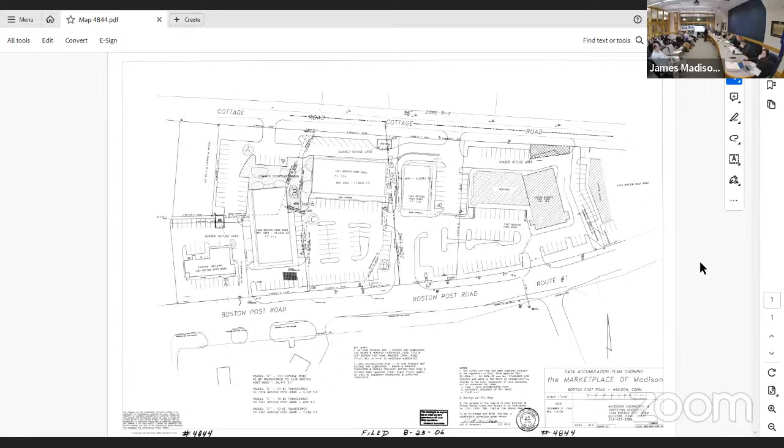Aaron, if you call up that map, I can email it. I'm going to hand out hard copies of these. This is a copy of a map that's on file at the town clerk's office. It was filed back in 2006. Giving it to you, I think it might be helpful with regard to what we're asking for in relation to what was previously approved by this commission. Great, thanks.

If you look at this, the property is at 1339 and 1341 Boston Post Road. They're between the Hammonasset Package Store, at 1333 Boston Post Road, and the white building with the pillars in front at 1343 Boston Post Road. So just to orient you as to what's going on.

Those properties were part of an application for special exception permits that was presented to this commission and approved by this commission in 2004, as part of the overall development of that section of town. It was located in the commercial district then, it's still located in the commercial district, now your C district under your current zoning regulations.

If you look at the map, this was filed in the town clerk's office in 2006. The properties we're talking about in tonight's application are, this is 1341, this is 1339. I want to point those out to you, but if you look at the size of the lots and the location and size of the footprints of the buildings, and compare them to what we're presenting this evening, they're identical.

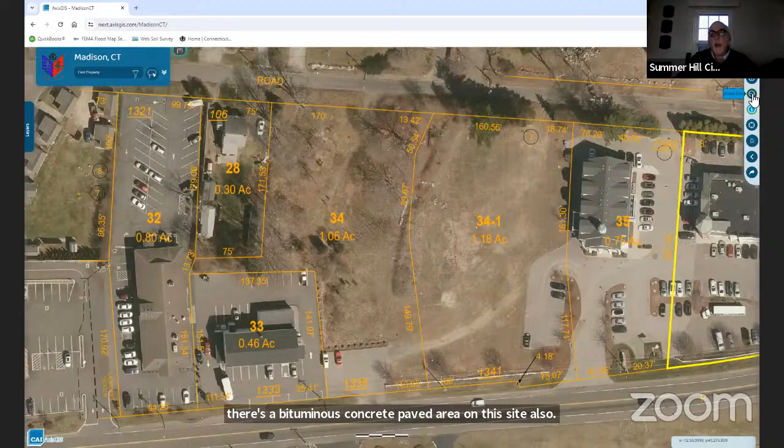the marketplace development. And then I'll zoom in just a little bit more, let me try to get rid of some of this. So this is a little bit more zoomed in of the 2 parcels, lot 34 and lot 34.1, and you can see that they're both undeveloped currently. This is a 2016 ortho photograph, and it's still accurate. It shows a 7 parking space area on the lot that this parcel uses, and there's a paved area here. There's no parking spaces actually delineated, but there's a bituminous concrete paved area on this site also. Please stop me if you have any questions while I go through this.

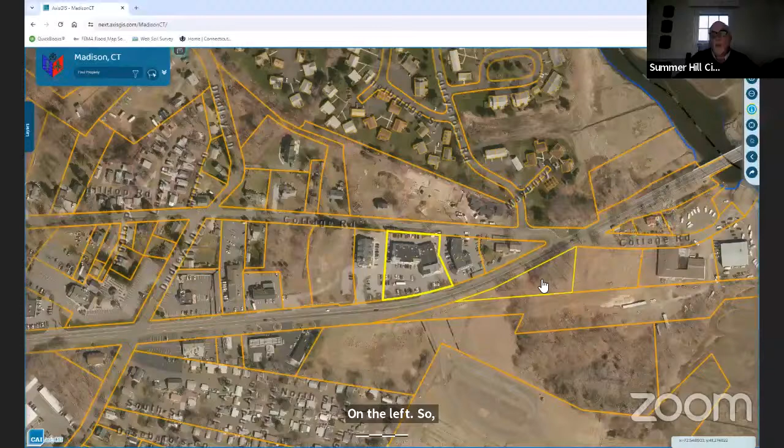I'll try to make this quick. So I've zoomed back out just to give you a little more context. So the Hammonasset River and the Clinton line, I know you're all familiar with this, but Salt Meadow Park across the street, and Dudley Lane here on the left. So the Wellington development is here, this yellow parcel that I just highlighted, and that's the development that's under construction now. And this is Windermere, of course.

So I'm going to, I think I may have to stop sharing, unless you can — can you see my plan set now? No, not yet, no. Okay, I think I have to stop sharing, unfortunately, and reshare.

How about that? Yep. Yes.

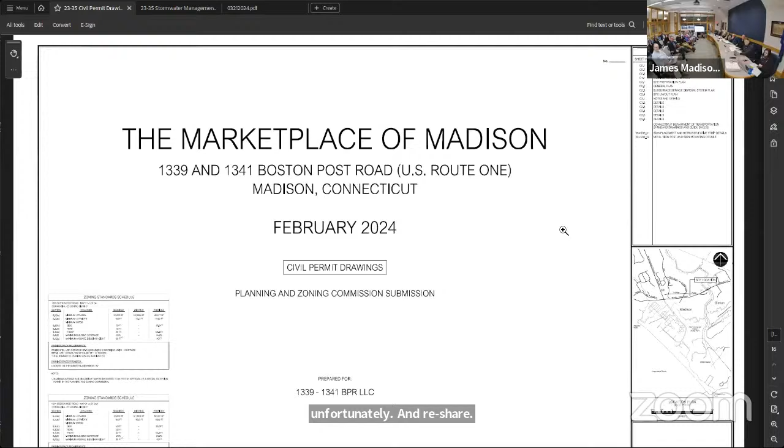Okay, so we prepared the civil engineering plans. We did a topographic survey of both parcels, and we prepared the plans. I'm going to switch to what I think is the easiest plan to look at first. This is the site layout plan, and it's easiest because it doesn't have any of the utilities and grading on it.

So you can see the Hammonasset Package Store parcel to the west here, and you can only see part of the building, but this is the white building on the 1343 parcel to the east. Boston Post Road is on the bottom of the sheet, Cottage Road on the top of the sheet to the north.

So we are creating a new access driveway here. We're planning to improve this existing connection to the 1343 parcel to the east, and make a connection to this existing driveway behind, also on the 1343 parcel behind the building. We're also proposing to make a driveway connection here that would connect the rear of the Hammonasset Package Store parcel to the 1339 parcel.

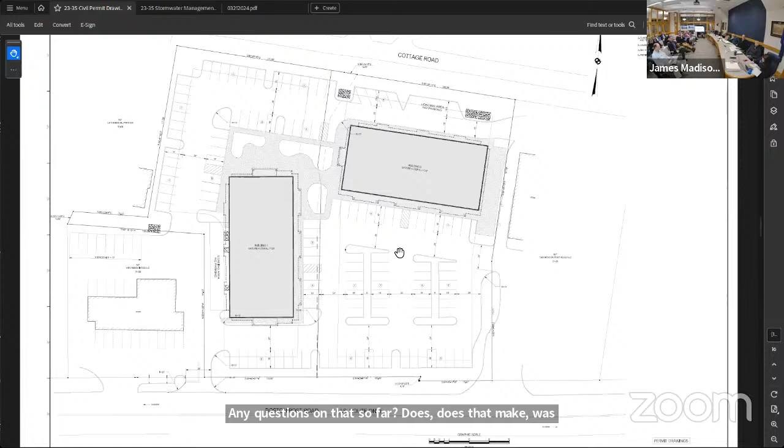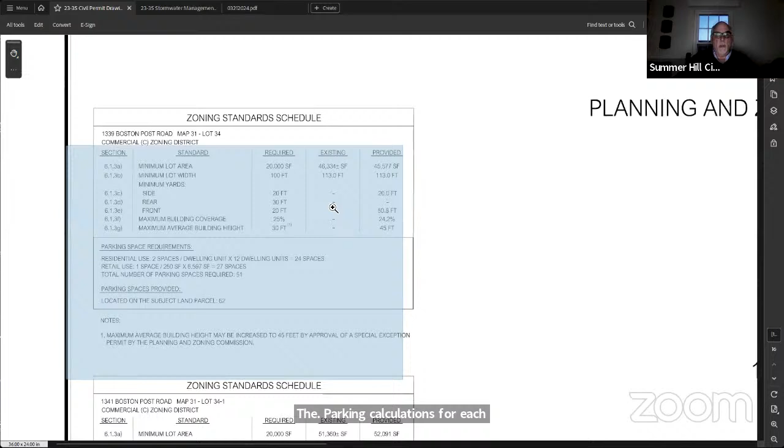So I'm going to go back to the title sheet of the drawing set and zoom in, just so I don't make a mistake, on the parking calculations for each parcel. So this is the zoning standard schedule for the 1339 parcel, and these are the parking calculations.

And as you can see, if you had the time to read these, the total number of parking spaces for the uses we're proposing is 51, and we're providing 62 on this parcel, the 1339 parcel.

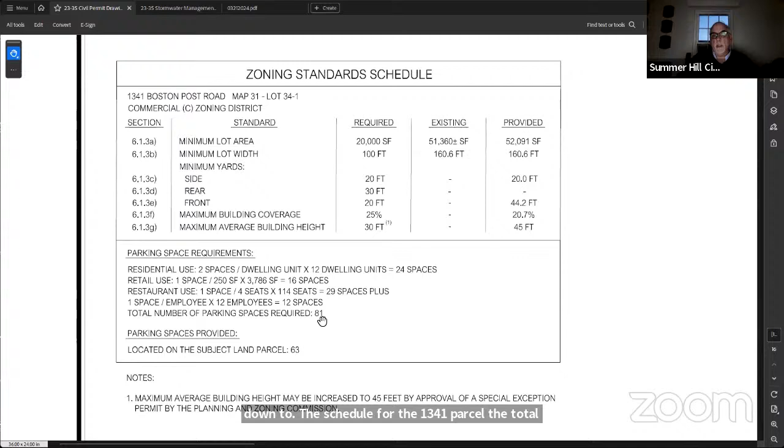And then if I move down to the schedule for the 1341 parcel, the total number of required spaces is 81, and we're providing 63. So we have an excess on one parcel and a shortage on this parcel. But when you add these up, in combination with the shared parking agreements that Attorney Beatty mentioned earlier, we feel that we have enough parking.

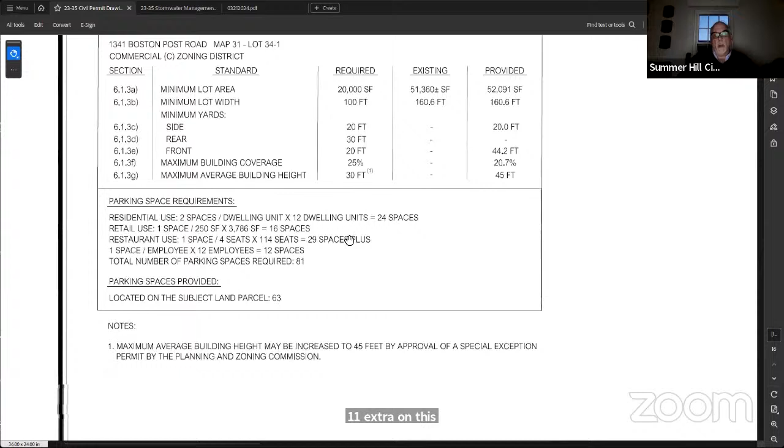So if I'm doing the math right here, we have 11 extra on this parcel, and we are short 81 minus 63, which is 18. So 18 minus 11 is 7, if I'm doing the math right. So that's technically our shortage by the numbers. But again, the shared parking agreement between all 5 parcels and the offset in timing of some of the uses of the site, we think more than make up for that.

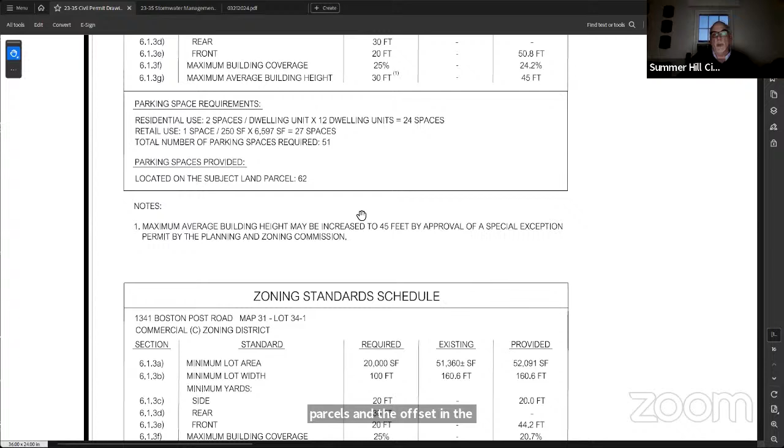Any questions on that?

So I'll move then to the major work that'll happen on the site. In addition to the construction of the driveways and parking areas, we have building utility services to serve both buildings, on-site subsurface sewage disposal systems to serve both buildings, and on-site stormwater management systems to handle the stormwater from the new parking areas, driveways, sidewalks, and building roofs.

So the soils on this site, as identified in our drawing set, are published as Hinckley soils, which are sands and gravels and typically have a relatively deep water table. In 2003, about a dozen test pits were excavated on the site, and those generally confirmed the Hinckley soil description. Two weeks ago or so, we excavated another 8 test pits on the site, and we again confirmed the Hinckley soil description, sands and gravels with a relatively deep groundwater table.

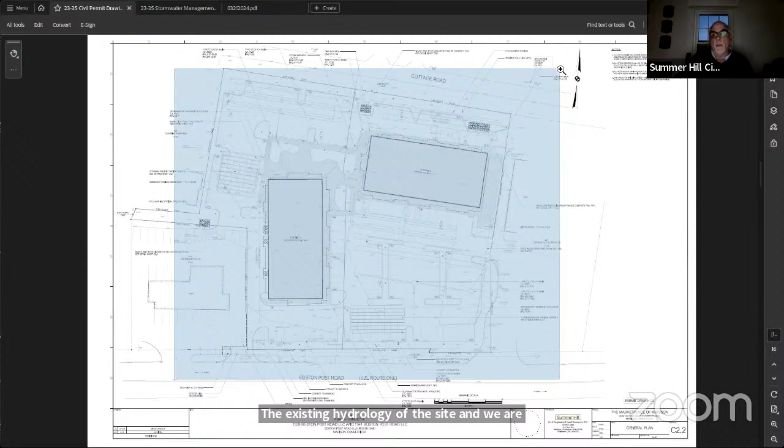In our proposal, we are doing the same thing. We're trying to mimic the existing hydrology of the site, collecting all of the stormwater runoff from the driveways, the parking areas, both building roofs, and all of the sidewalks, and directing it to subsurface infiltration systems. That's what this big grid is here and also here.

So with the exception of a small portion of this driveway connection and a portion of this outdoor seating area, which will both drain off-site to the east to two existing dry well structures, stormwater infiltration structures, all of the stormwater is collected, treated, and directed to subsurface stormwater infiltration systems. So there's no surface discharge off-site of stormwater runoff.

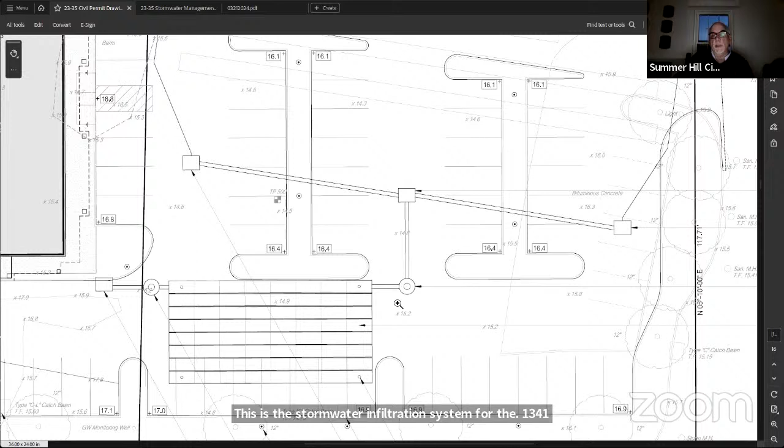I'll zoom in and show you a better picture. This is the stormwater infiltration system for the 1341 parcel. Before stormwater enters the system, it goes through a stormwater treatment structure, a hydrodynamic separator type. Similarly, on this side, there's another stormwater treatment structure for the infiltration system. So pre-treatment is provided before stormwater runoff enters the subsurface system.

If I zoom back out, I'll show you the same thing at the other stormwater management system. There's a stormwater treatment structure here. There's only one inlet to this system, so only one stormwater treatment structure is required.

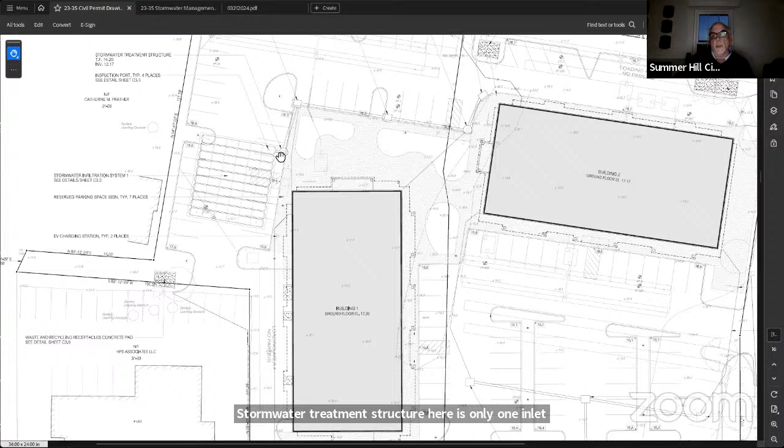That's a brief description of the overall stormwater management system. We've designed it in accordance with the guidance in the new Connecticut DEEP Stormwater Quality Manual that becomes effective March 30th, though most people have already begun designing to those guidelines. The stormwater management plan for this project complies with the new manual, and we submitted a stormwater management design report with this set of plans that documents the design and engineering of the system.

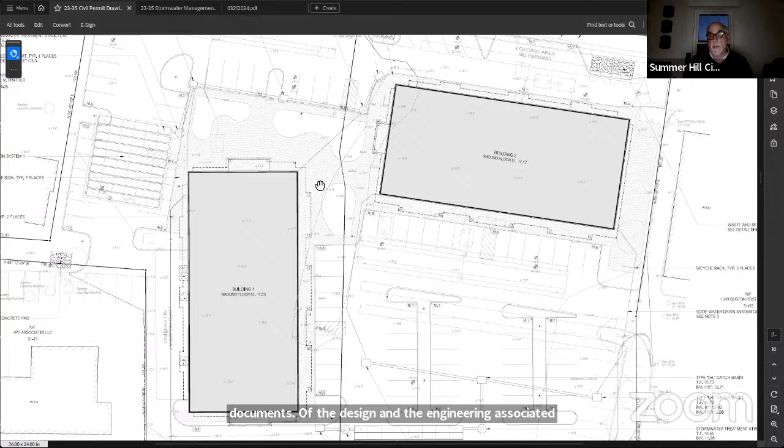Any questions on stormwater from the commission? I have one question, just curiosity - what does the pre-treatment system do for water?

The stormwater treatment structures are called hydrodynamic separator structures - there are different types. The internal components are designed to remove debris and trash floating in the stormwater. They also remove sediment from the parking lot, and you'll see in the stormwater management report that we chose this type of structure purposefully because they're approved by the Connecticut DOT. They've been tested by an independent testing laboratory to ensure they achieve the results required in the Connecticut Stormwater Quality Manual.

They can also store the predicted sediment load from the parking areas, mostly due to winter season snow and ice control operations. So they pre-treat the stormwater prior to its discharge to the subsurface infiltration systems. There's a detail on the plans for these structures, and we included the maintenance and inspection manual for them in our stormwater management report. I can show you that if you'd like, but it is included in the report.

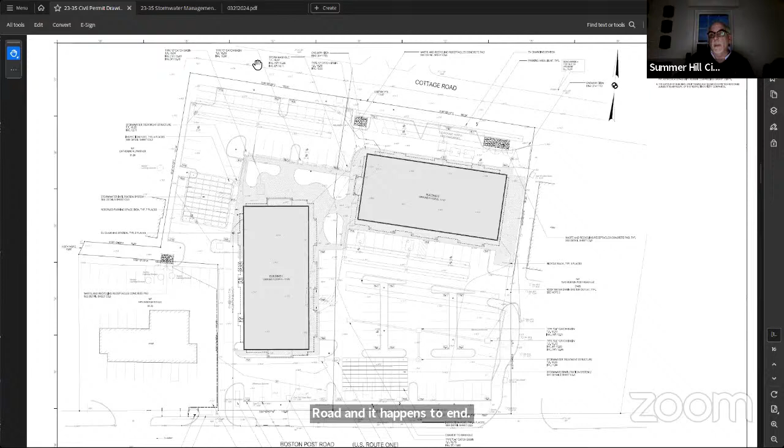Thank you. So we should probably move to wastewater. We talked about building utility services, but just briefly - there's a water main in the Post Road, Boston Post Road, and it ends right in front of the 1341 site. There's also a water main in Cottage Road. So we're proposing to serve the 1341 building from the public Connecticut Water Company's public water system from Cottage Road, and we're proposing to serve the 1339 building from the same system, but from the main in the Post Road.

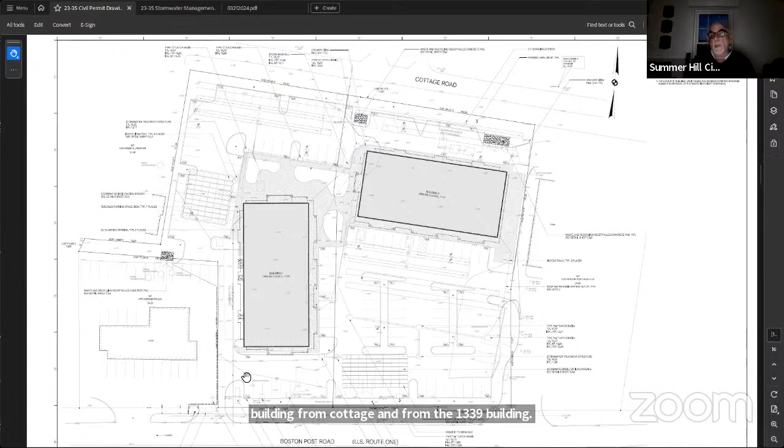And the communications and power utilities - communications being cable TV and telephone - will also come in the same manner: for the 1341 building from Cottage, and for the 1339 building from the Post Road. We've reached out to the water company and all the utility companies, made sure they could serve us, and have talked preliminarily about the routes to bring the utilities in. So we're confident that we can serve the two buildings in that way.

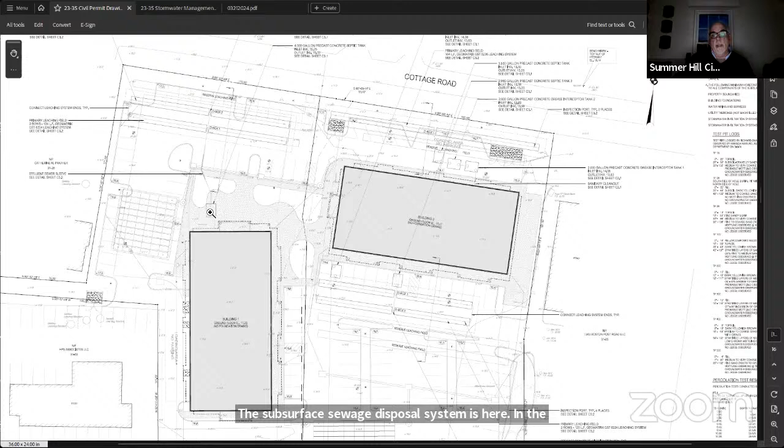The only other utility, as you can imagine, is wastewater. We have 3 on-site wastewater systems. I'm going to switch plans here - might be a little bit clearer. For the 1339 building, the subsurface sewage disposal system is here in the rear of the site. There's a large septic tank here, and an effluent sewer that goes out to the leaching field or disposal field for the wastewater effluent.

The main system for the 1341 building is here in the front. In this system, there are 2 separate septic tanks, with building sewers leaving the front of the building. In the rear is the septic system for the restaurant that is planned to be in the eastern part, the right-hand side of the 1341 building.

I'll zoom in a little bit. It requires 2 grease interceptor tanks - that's what these 2 structures are. Then there's a septic tank before the wastewater effluent goes out to the leaching field, which is here, stretched out along the width of the frontage along Cottage Road.

So that's the 3 on-site subsurface disposal systems that'll serve the buildings.

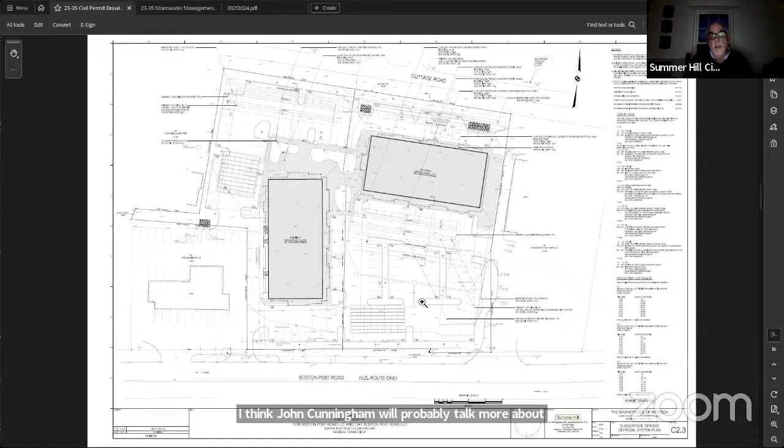We are proposing exterior site lighting, parking lot lighting all around the parking area. John Cunningham will probably talk more about this later, but we worked with a lighting company to match the appearance of the poles, bases, and luminaires already on the two parcels to the east that are part of the marketplace, and she was able to do that. We submitted an exterior lighting photometric plan for the two sites, and made sure the lighting meets all the current backlight, uplight, and glare requirements.

They're LED luminaires. The color temperature is 3000 Kelvin. John Cunningham will probably talk a little more about that. I think he'll tell you there will be some bollard lighting, possibly for this seating area and also for this outdoor garden terrace area between the two buildings, which I'm sure Bill described.

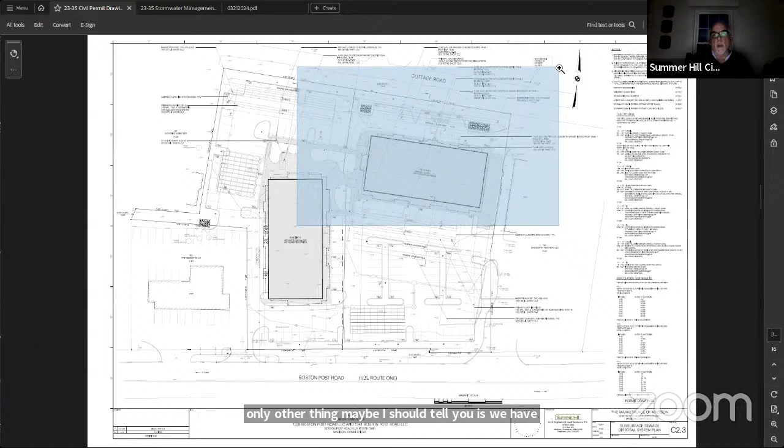I think I've covered everything. I hope that wasn't too fast, or maybe it wasn't fast enough, but I'd be glad to answer questions. The only other thing I should mention is these areas for waste and recyclable receptacles. There's a larger area here because of the restaurant, another area here, and a third here.

So I think I may have missed something, but I think I've covered everything. Happy to try to answer any questions you might have, or turn it over to the next presenter. I think it might be John Matthews.

I have a question, Mike. The service entry and the cable TV entry, is that underground or overhead? Oh, all underground, sorry, I should have mentioned that. Yep, all underground.

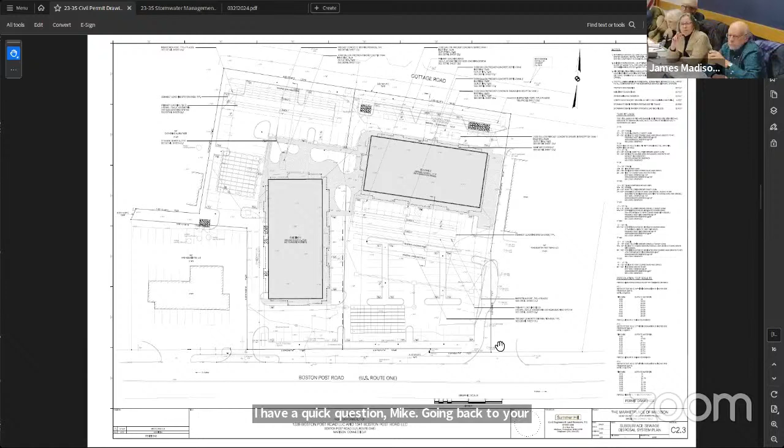I have a quick question, Mike. Going back to your aerial view of the site, it looks like there's a berm, some kind of berm between the two lots. There is, it's kind of funny. We actually show it on our survey. I'll see if I can share it again. Can you see the aerial photo now? Yes, so there's an earthen berm here.

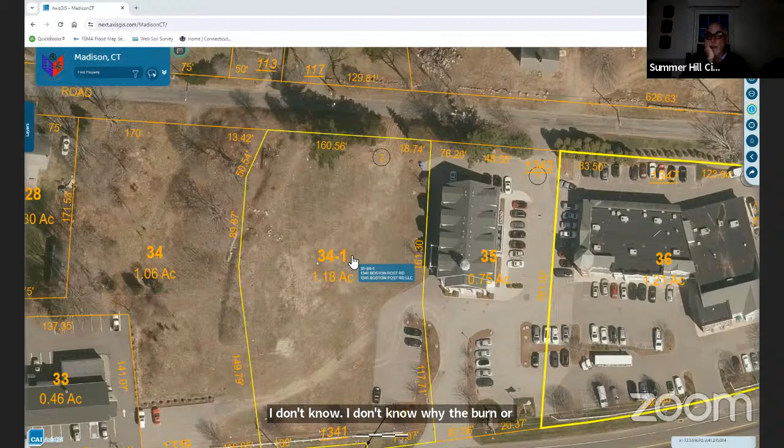I'm tracing it, if you can see my cursor. It's probably 3 feet or a little more high. I don't know why it's there, but it'll be graded out and removed. We hope it's not archaeological. Oh, I doubt it. Having been around town a long time, I kind of remember what's happened here. There used to be small cottages on these parcels years ago. Sometime before I was the town engineer, I know the town was involved in having them removed. I don't know why the berm was pushed up like that, it's obvious it was formed by man. It could actually be topsoil, somebody may have pushed off the topsoil because this site especially is pretty barren. There's not much topsoil here, so somebody could have pushed up topsoil and taken out some gravel at some point. I'm not sure.

Another question for you on that drawing, that pictogram. You said you're going to have an entryway to the back of the Hammonasset package store? Right about here, yep. They're giving you permission to do that? Because it looks like they'll lose a couple of parking slots. Yeah, good point, I should have brought that up. Our plans show there's actually, I've been out here and taken measurements, there's 8 parking spaces here. Our plans show moving all 8 of them to this side of the parking lot where there's no delineated parking spaces. So yes, you're correct.

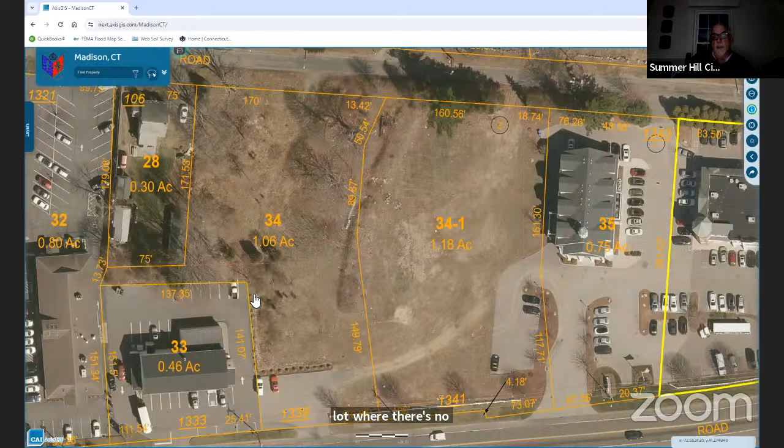If I go back to the plans, you can see the driveway comes right through here, but we're taking these 8 spaces and kind of flopping them over and putting them on this side. There's also 1, 2, 3 parallel parking spaces here in the front, and our new driveway will eliminate 2 of them. These spaces do not meet standards, they're too short, 4 feet too short, all 3 of them.

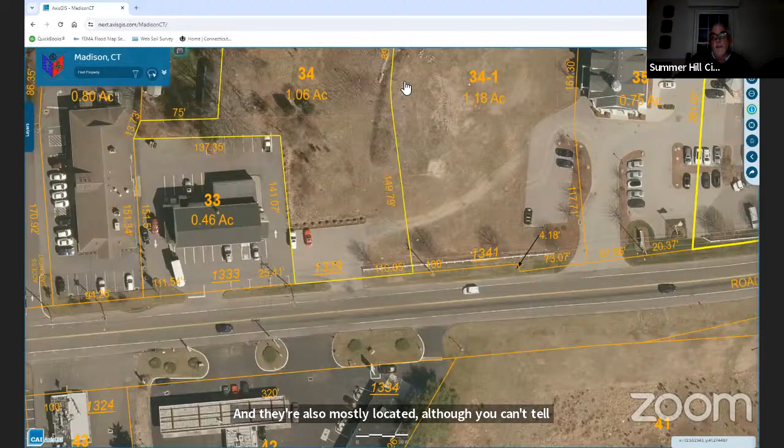And they're also mostly located, although you can't tell by the GIS, if I flip back, maybe I should do that. Let me flip back to the plan set. They are actually located, most of their width, within the state highway. Bear with me one second, just trying to get back to the plan set.

Okay, can you see the plans now? Yes, let me zoom in here. So this horizontal line with the two dashes is the highway line, and these are the three spaces, 1, 2, 3. You can see that the majority of their width is actually located within the highway.

Let me switch to the next couple of sheets, which will show the driveway connection. So as you can see, this existing space and this existing space will go away, and it will leave this one parallel space.

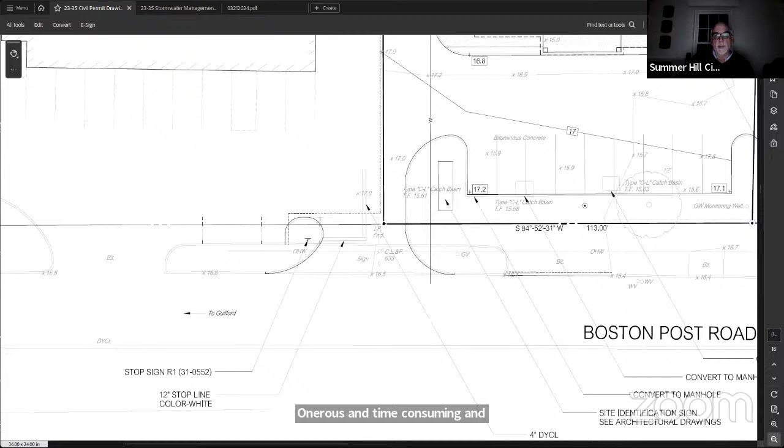The commission probably knows this, but the Connecticut DOT has a current policy. They never used to do this - a long time ago, they used to meet with us out in the field to discuss the project before we submit to planning and zoning. Now they would rather not look at the plans until we receive local planning and zoning approval. So once we do, one of the first things we have to do is coordinate with the Connecticut DOT, and we'll have to talk about this space. In my experience, it's likely they will say remove the space, or enter into a license agreement with the state if you really want to keep it. The license agreement process is onerous and time consuming, and I'm guessing that for one parallel space we might not do that, but that'll get fleshed out when we work through the DOT coordination process.

Oh, and here's that area that you mentioned earlier. Here's the new driveway, and see the dashed lines - those are the existing spaces. Those are the spaces that get moved over to the other side.

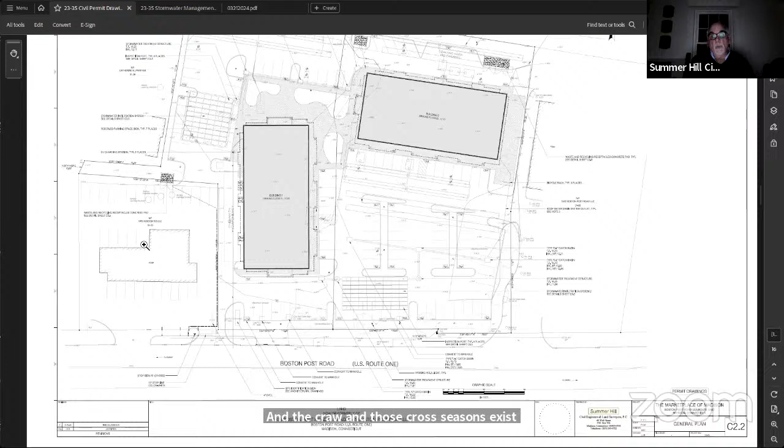Is the package store in common ownership with the development? They're signatory to the common parking agreement. Thank you, that explains it. Yeah, it's one of the 5 parcels that make up the marketplace development, and those cross easements exist, so they would have the right to use the parking.

Mike, if you could highlight the parking area that's going to be constructed closer to the post road in front of 1339. Yes, so let me switch sheets, I'll make it easier for you. You see this little 9 in the circle? There's nine parking spaces right here, and here's the Hammonasset Package Store building.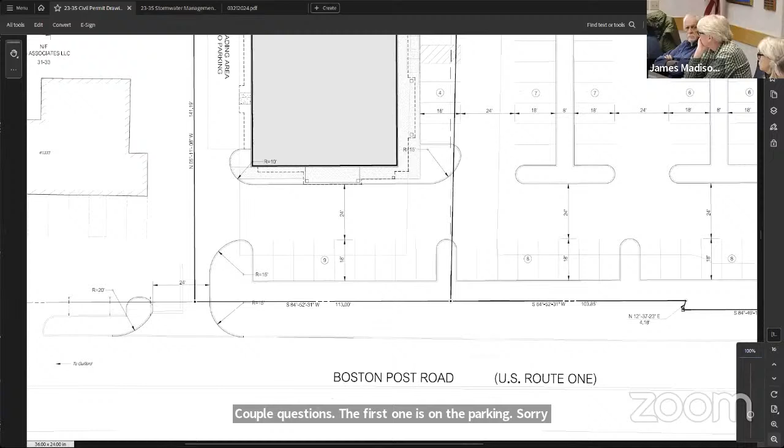Bob Reinhardt, I have a couple of questions. The first one is on the parking - I didn't catch before that there was a disparity between the number of parking spaces for each building. I didn't check the drawings, but has there been adequate consideration given for safe walking back and forth to get to the parking far from your building, with sidewalks or walkways or something within the parking lot?

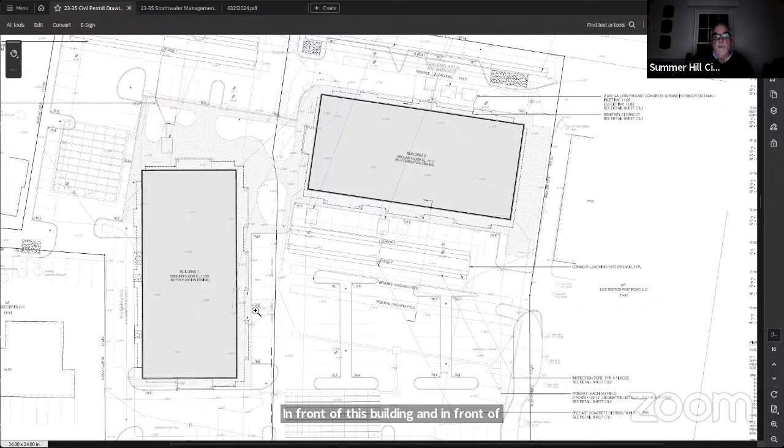I think I heard your question, though it broke up a bit for me. This lighter gray area, lighter than the buildings, is all sidewalks. There are sidewalks all along the length of this building and the short length, all the way around this building. There's a sidewalk here, and again sidewalks all the way around this building. And there are accessible sidewalk ramps here, in front of this building and in front of this building, for people to come up the sidewalk ramp and get into the sidewalk network.

Okay, thank you. A couple more questions. One is - I saw in the plans that the access to and from Cottage Road is on the driveway on the far right. I think the driveway on the left is security only, or emergency access only - it's gated.

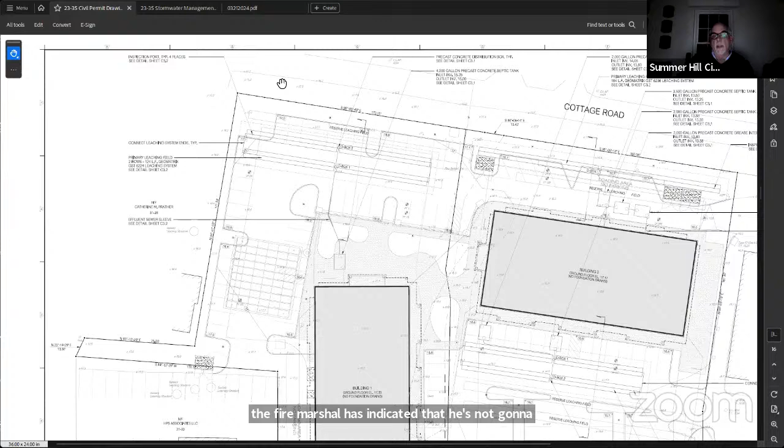No, oh, I'm sorry, go ahead. I'm saying in one of the plans that access point is gated - is that correct? Not anymore, that was an early plan. As you can see here, we're not proposing any connection to Cottage Road. That was an early plan, and it's my understanding that the fire marshal has indicated he's not going to require an emergency drive out to Cottage. So that's a very good question - there's no vehicular connections to Cottage Road being proposed.

My question is that there's that development occurring on Cottage Road, and now this.

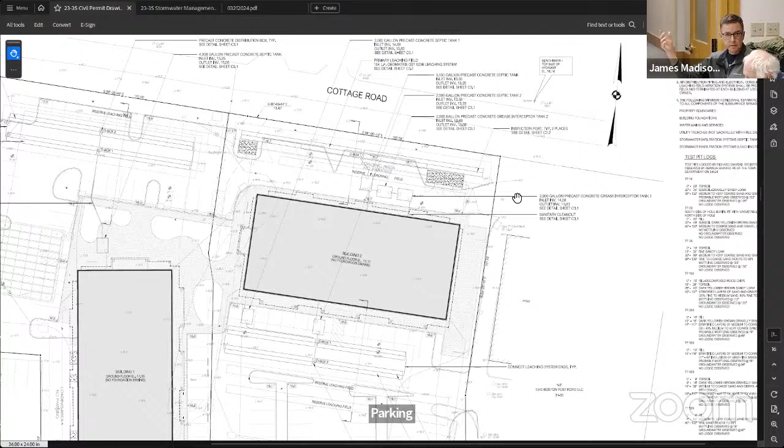Parking lot, the plan I looked at was one way, but do we need a traffic study to look at traffic flow of Cottage Road, next to Boston Post? We keep going all the way up, that's gonna be a clear shortcut for people who live there. So has that been looked at?

We have David Sullivan from SLR Consulting, our consulting traffic engineer on the project. He still has a bit more work to complete his report, but he's been collecting traffic data and they're fairly far along. We made some recent changes to the plans, which caused him to adjust his report slightly, but he should have it available to town staff next week. I think he's on here tonight with us, but it might be a little early to put him on the spot to answer traffic questions. I'll leave that up to Dave. That's fine, we can wait till the report, as long as it's coming.

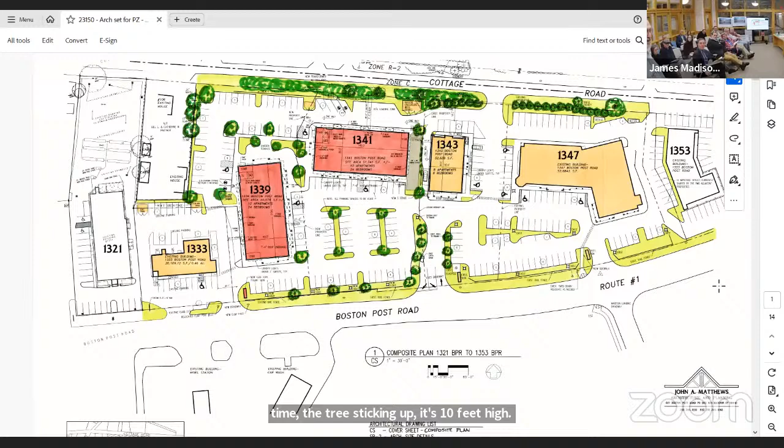And so in terms of the site plan, another thing I wanted to point out, you look at this as a big parking lot and a 3-story building. But these trees right here are very mature Zelkovas. So looking through here is not like looking at a new shopping center, which has 2-inch diameter trees sticking up that are 10 feet high. These things are like 30 feet high. They're beautiful trees. So in terms of the building, we can just run through that real quick.

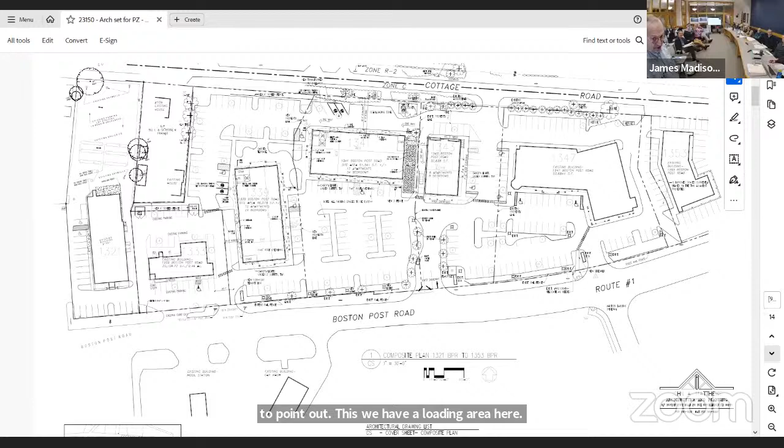And in this little package I gave you, it shows some of the things. So this is just a black and white version. And again, this is a patio that would be serving the 3,000 square foot plus restaurant on this end of the building. And then also what I'd like to point out is we have a loading area here for this retail and particularly the restaurant. And there's also a loading area here for this retail.

So let's just, and these are just some, that's a sign we're putting up for the new tenants. And this just shows some bollard lighting and bike racks. And these are the site lights and tables and chairs. And then we have 2 EV charging stations for each residential area.

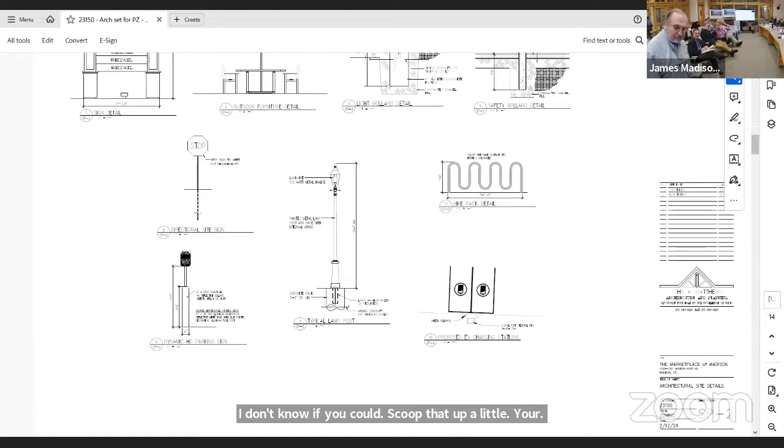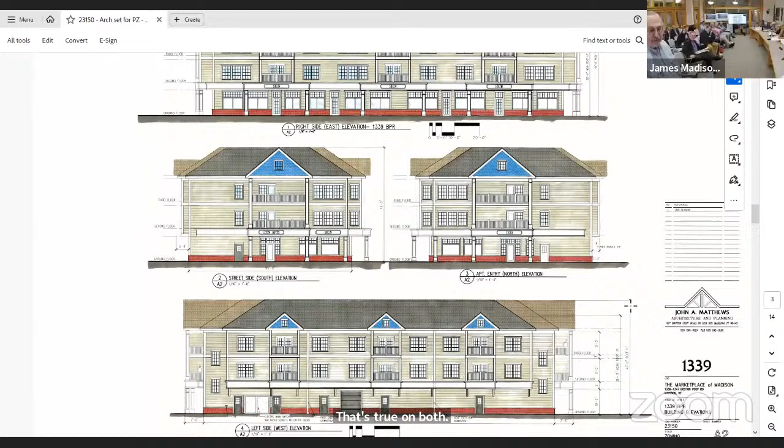And this is the post road side. And at the end of the building, we've done a porch that all the tenants can come and sit out on and enjoy the view. And that's true on both ends of the building. And then this is our sort of color scheme. It's a gray color, and we've got like a blue highlight to try to pick up a nautical theme here since we're so close to the water. And that's just the back side.

In case we might have an overhead door for one of the retail tenants, we don't know who's going to be there yet, so those doors may change as we lease the building.

Okay, let's keep moving. That's just the black and white version. And then this is 1341. If you could move up just a little bit.

This is the entrance in that little courtyard. In this corner where we had the community room at 39, we have a fitness room where people can work out, do yoga and whatever.

This is set up probably for 2 tenants, even though it could be 3. This is the 3,200 square foot restaurant, and this is a patio out here with doors that open out to outdoor.

Can I ask a question? The restaurant, is that going to be just for the residents or will that be for the outside too? We're shopping around to find the right restaurant that wants to come to Madison. Great, thank you. We talked to some of the other restaurant people and they're quite positive. I had dinner at Donahue's last night and Jack said, the more we have here, it's better for all of us.

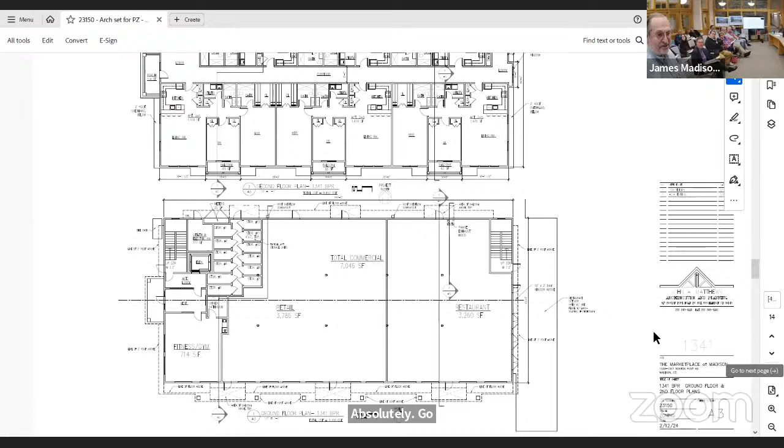So if we go up to the second floor, it's pretty similar, except we don't have that bump that makes the 1,500 square foot units. These are only 1,450. The third floor is the same, and the roof is the same with our bathtub for the air conditioning.

Okay, let's go. The elevations are pretty much similar. One of the things when we met with ACA is that we raised the windows to 6-foot windows because we have 9-foot ceilings. The earlier version had 5'2" windows. Some of the drawings have been changed, but the renderings still show them at 5'2", the big elevations.

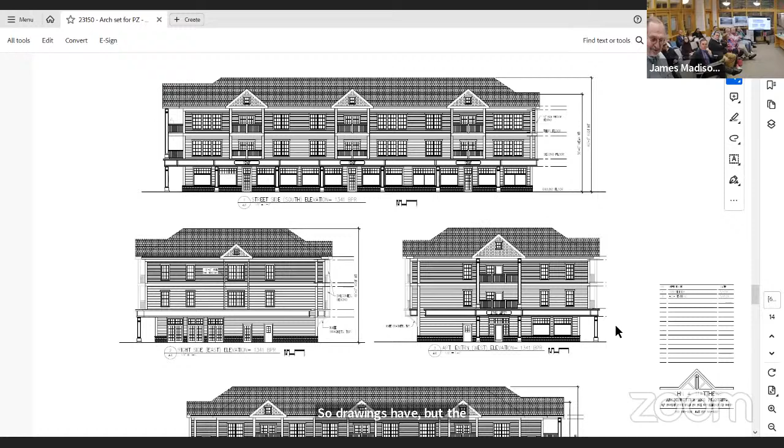Okay, let's keep moving. This is just a bigger blow up. This is the porch, the entrance to the condos on 1341. It has a smaller porch. The one for 39 has that bigger porch. That shows some of the details. This is the balconies that face the fronts of the building.

So that's the 5-foot windows, and there's the drawing with the 6-foot windows.

Okay, and this is just some sections. You can see here's our 45-foot height. This roof comes up and then it drops down. There's all the air conditioners, but nobody sees them except the guy who services them. And we have a stair and an elevator going up for that.

I think if anybody has any questions about that, it's pretty straightforward. I just have a couple questions. How's the noise going to be having all those units on the roof? They'll be on sound isolation in their space.

There's this much space between that and the ceiling of the units, so that's how to keep it from being an issue. We can put as much acoustical insulation as we need, and they get put on the right kind of brackets. That's how you do it.

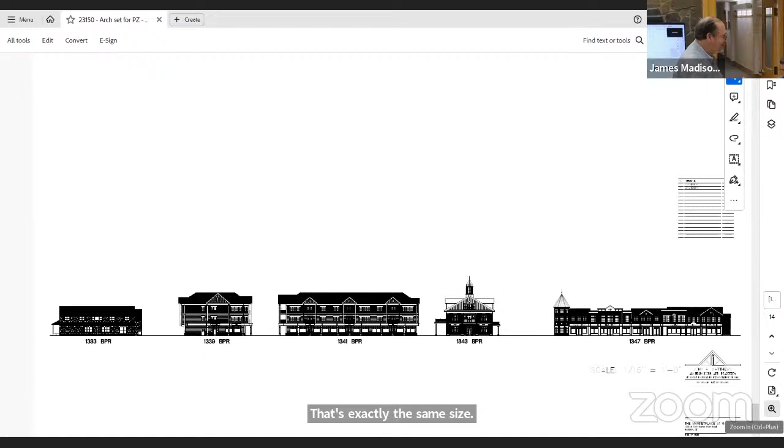Even though they're 3-story buildings, a little thing I wanted to show you: it so happens that in the town of Branford, if you drive into New Haven, on the right you see these white apartments. There's a building there that's exactly the same size as this building. The irony is, our mechanical electrical engineer did all the electrical, and our structural engineer did the structure. This is for Bob Smith down in Milford, but that's exactly the same size as our building. So you think of it as a 3-story, it's not that big.

You're in a flood zone here, right? No, you're not. Okay, it's good to have all the utilities and everything up on the roof, but I was thinking for the restaurant and all the commercial properties. Well, we have internal drains and overflow drains, so it shouldn't be a problem. The snow gets up there, Joe goes with the shovel.

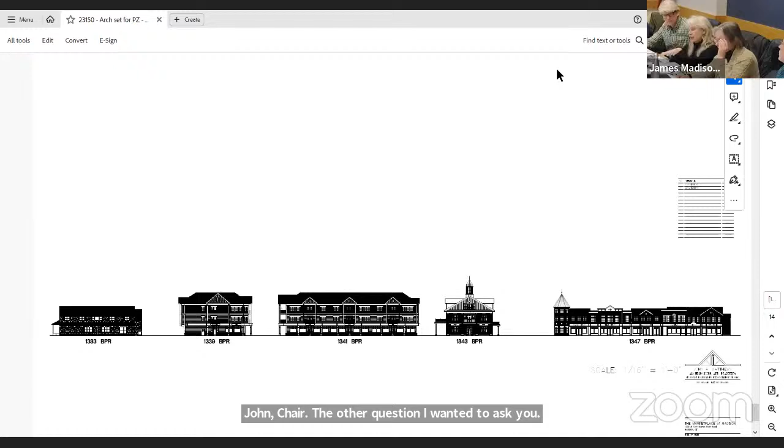I heard you mention, or maybe it was Mike, refer to this as luxury condos and then also apartments. No, he misspoke. It's luxury condos, so they will be sold. We were typically using the term residential units, but it's condos. Okay, thank you.

So I don't know if I have anything else in here, Aaron. No, you have your renderings. Yes, but they're in here too, if you want to put them up so everybody could maybe see them better.

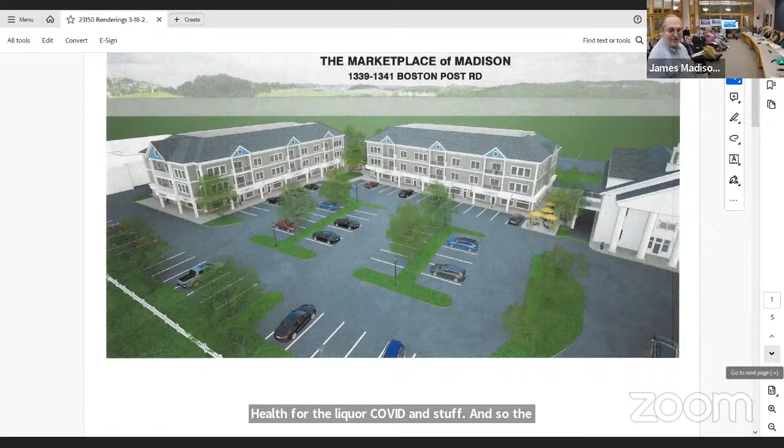So this is an aerial that's made. This is the existing driveway entrance that's there now. There's the white building, 1333. This was set up originally for a drive-in for a bank or something, but that never happened, but the driveway is still there. This is our patio, umbrellas - we'll probably have to have a little fence around it for the health code and liquor code stuff. The restaurant is here, and that's the 2 stories of residential, and you can sort of see our bathtub back up in there. Then the parking lot goes out, and that's the new shared driveway we're constructing. There's a package store in the distance.

Let's go to the next one. Here's a shot from the entrance driveway. You can see the 2 lanes coming out, the white building again, the patio, and then there's this existing fence that goes along. Then you have these trees - those are actually taken from an actual photograph, I think - so they really do screen this off.

Let's go to the next one. That's just a front view of 1341. There's the patio, so you can see it in a little closer detail.

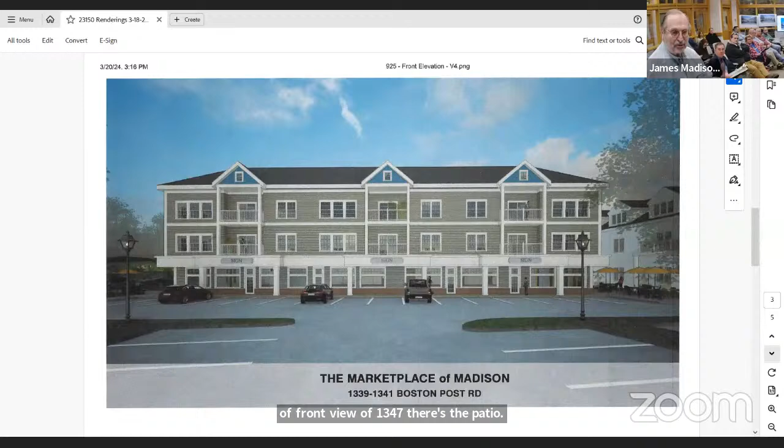And then this is the view looking towards the residential courtyard, 1339 on the left. This is the fitness center there, and that's the community room there.

And then this is a view from that little courtyard in the back. This is the entrance into 1339 - it says apartments, but we didn't want to put condo up there. And then that's going into 1341. This is where, with John Cunningham, we'll end up doing a really nice courtyard patio, and this has the bigger porch versus the smaller porch. The reason we couldn't do that here is because of our side yard issues.

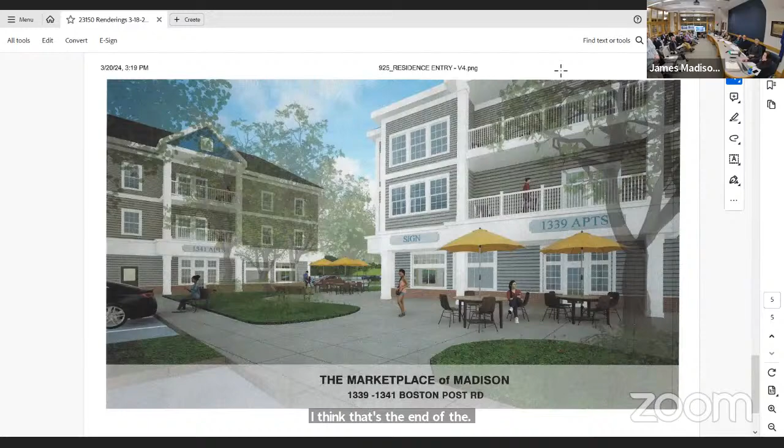John, this would be the view from the parking lot between the building and Cottage Road. Right, that's the view if you're behind the building, between the building and Cottage, coming in from Cottage Road parking - that's the building on the right, and then that's 1341. All right, I think that's the end of my presentation. Does anyone have any questions about the buildings?

We're still working with a lack of colors. We originally had a much darker color; these have been lightened up. They're going to be bringing in real samples - brick, siding, shingles, the whole 9 yards.

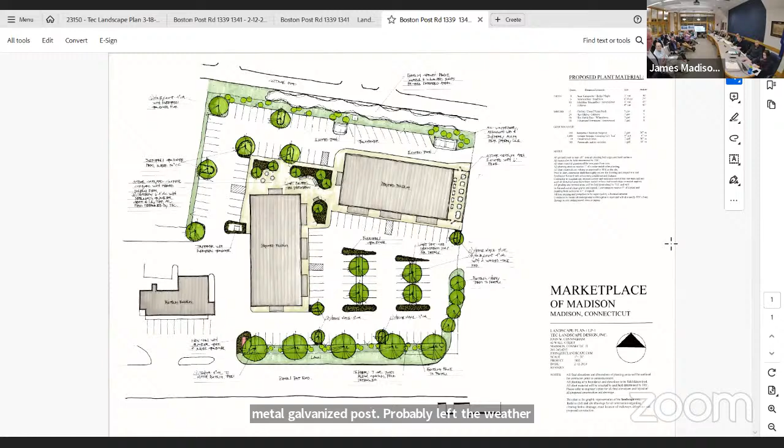John Morgan: there's a house to the left, correct, of the property at the back? Right here, that's our house. Is there any plantings or fence or anything? We didn't propose any, if the neighbor wants a 6-foot fence.

Is it on the site plan? Yeah, okay, I apologize. There's a 6-foot fence along the property line. There's not really enough room to plant, but there is a 6-foot high solid fence that runs along the property line. Yes, correct. And then what about the lighting?

I would assume because of the residential part, the lighting will stay on all night? No, I would doubt that. The fixtures on the buildings themselves, I'm sure would be on some form. I'm going to guess there's going to be security lighting at some point in most of the buildings. Sure, that is on. Our lighting in the parking areas is probably going to go off at some point in time, Janet, same with our bollards.

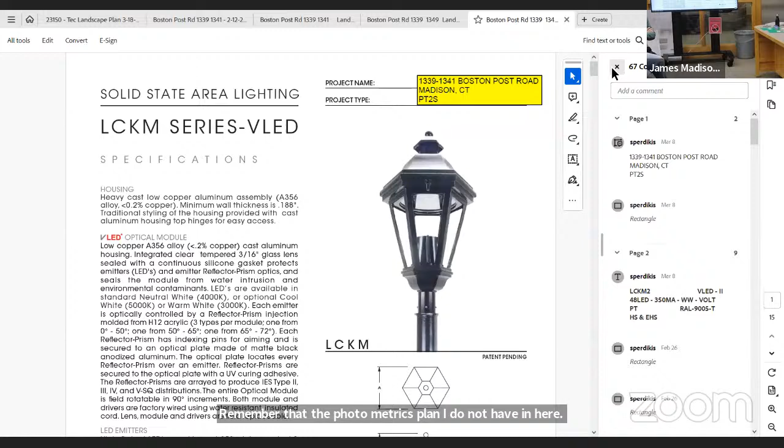I was wondering again. Yes, but remember the photometrics plan, I do not have it here. I can bring it for the next meeting. There's no wash off the property, and they are all dark sky compliant fixtures, so the light is all pushed back down. Nice, and they're 12-foot? Yes, I believe they're 12-foot posts.

John Matthews: essentially there's a roof running around the first floor ceiling of those buildings. There's going to be soffit lights in that, so the walkways will be lit with down lights. They can be controlled so during business hours more are on, after hours every third one is on or something, because there's going to be a lot of pedestrian activity on this side. My guess is the entrances to the buildings might want to be lit, but I think areas along the walkways would probably want to have it dark.

Anything else? Okay, thank you very much. Thank you.

No one else tonight. Okay, thanks for that presentation so far, it's been a great introduction and overview. Because this hearing will be continued, I just want everybody to know that. We don't have all the information we need tonight, so we're going to propose that we extend this hearing to April. But in the meantime, if there are no other questions from commissioners, I'd like to open it up to attendees who are here for this presentation, and also if you have questions, especially that would be useful for the applicants to hear.

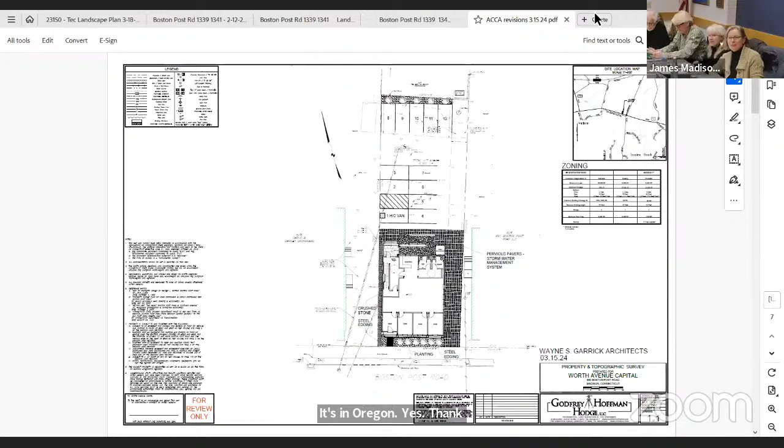Okay, thank you. 885 Boston Post Road. Good evening, my name's Wayne Garrick. I'm an architect. My office is located at 291 Whitney Avenue in New Haven.

This project was before you and approved by you just about a year ago, as a matter of fact, and it was well received. We appreciated everything in the comments made by you then, and we actually brought the project through construction drawings. We finished the construction documents in August, they went out to bid, and bids were received in September. They were actually quite favorable. But for one reason or another, the owner developer of the project decided not to proceed with his plans and construction, and began to market the property.

So perhaps most of you have seen the sign that was on there for sale. Not long ago, about 2 months ago, Mr. Dow, owner of Amity Physical Therapy, went into contract as an option to purchase the property and to use it as a physical therapy office project as opposed to the restaurant and apartments. The office use is a permitted use as of right. We haven't changed very much to the project - this is really a very, very minor modification to what we initially had.

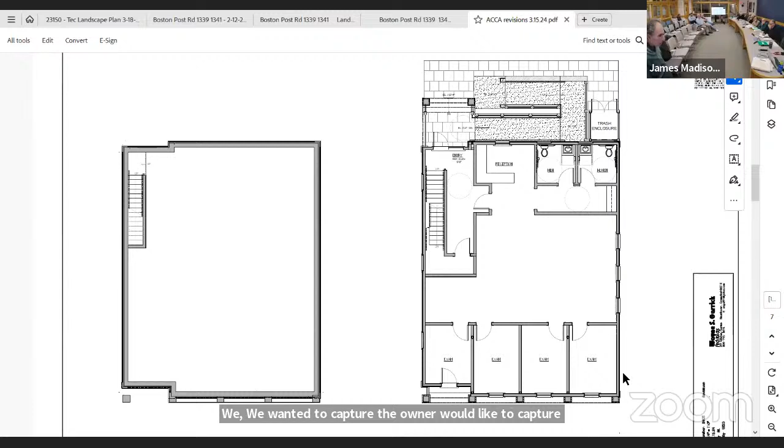If you remember, along the front, there was a porch for the building. We wanted to capture, the owner would like to capture that space for his offices and for his PT uses. But we had a very successful meeting with ACCA last week who approved this. One of the suggestions was to create a doorway at this area here that's set back anyway at the second floor level, so we've changed the plan to reflect this doorway.

And there's still, though, like the porch, there's still a reveal along Route 1 there with the same columns and architectural features and details that we had before. That is essentially the scope of the project and the modifications that we're presenting to you this evening.

I'm really glad to see that door, because I looked at it and I thought, well, you kind of turned the building around and turned your back to the sidewalk and this pedestrian area of the downtown village district. So it's great to see that you were able to make that change.

Maybe we can go to the front elevation, perhaps. I guess it's the south elevation. Yes, so this is the door here. Actually, this entire area is identical to what we had last year. The only difference is now that the door is over in this area here. This door is set back approximately 3 feet from the column line, and this area on the second floor is set back 6 feet, which it was last time as well.

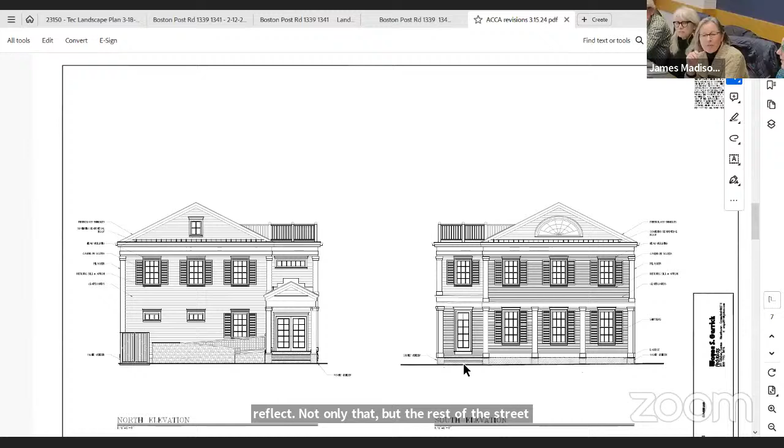And I even wanted to ask if you considered saving the historic structure. Even last year, the historic structure has totally deteriorated, it's structurally compromised to where it would be impossible to save, because of the low ceiling heights and things of that nature. But the whole concept of this building was to reflect not only that, but the rest of the streetscape. I drove there today just to have a look and saw that every other building is Greek revival, and they all face the street, they all have entrances from the street, so I was concerned about that. When we approved the demolition previously, it was for a much different use with the restaurant and the 2 apartments, and I thought, well, you can't possibly salvage the building or do adaptive reuse for such a change, but I wondered if you could for something like offices.

It doesn't really meet the code. Really, one day last year, before we appeared before you, I ventured up those stairs to the roof, and that's as far as I went, because I can assure you it's gutted and needs to be redone. But in our specifications, when we produce the construction drawings, part of our specifications included, first of all, hopefully retaining that existing fan window that's in the gable and reusing it.

I've also written in the specification to retain the existing foundation stones, and we're reusing them, if you recall, on our landscape plan for the curbing of the planting areas. In addition, any interior doors or things of that nature that we find we think we could salvage and reuse, we will.

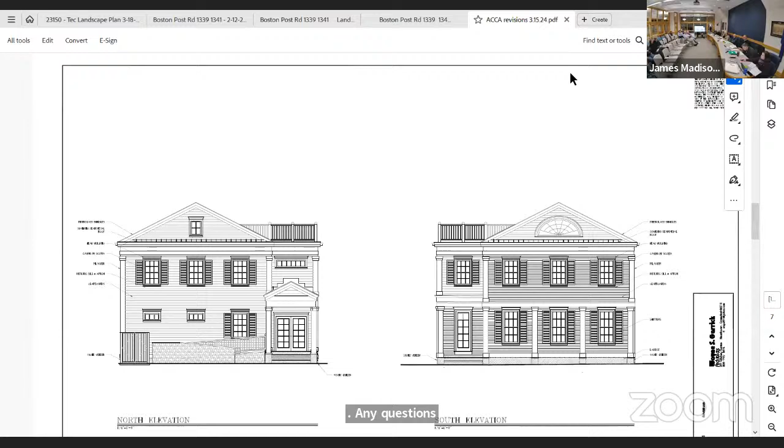Any other questions from the commission? All right. Any questions or comments from the public?

Is there a hand up? Sorry, am I not seeing someone online? Ron Clark has his hand raised. Okay, sorry, I can't scroll down to them. There it is. Oh, you got thumbed up. Okay, we have Ron Clark.

Good evening, everybody. My name is Ron Clark. I live at 6 Everett Lane, which is the abutter directly to the north. And on face value, I think this is not a bad alternative to what had been proposed.

However, I have a couple of questions. Number one, as an abutter, I received my certified letter notice, which consisted of a copy of the full agenda for the meeting. No cover letter, no detail, no information. Since I previously served on the commission, I was able to ferret out what was going on. But I would like to ask Mr. Garrick why no other information was provided other than the entire agenda for the meeting, and how people were supposed to figure out what it was about.

I believe we mailed the legal notice to everybody. Not the agenda - we mailed the legal notice to everybody. Oh, okay. With no other information, no cover letter. And I'm wondering if that may have left it up to others to decide what it was about or for.

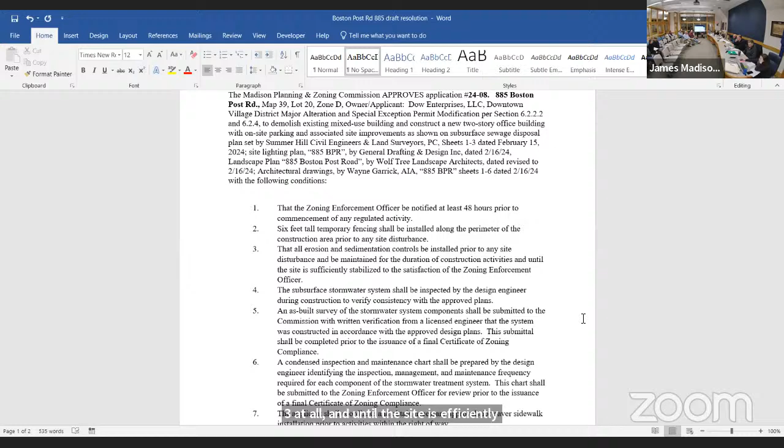Four, the subsurface stormwater system shall be inspected by the design engineer during construction to verify consistency with the approved plans. Five, an as-built survey of the stormwater system component shall be submitted to the commission with written verification from a licensed engineer that the system was constructed in accordance with the approved design plans. The submittal shall be completed prior to the issuance of a final certificate of zoning compliance.

Six, a condensed inspection and maintenance chart shall be prepared by the design engineer identifying the inspection, management, and maintenance frequency required for each component of the stormwater treatment system. This chart shall be submitted to the Zoning Enforcement Officer for review prior to the issuance of a final certificate of zoning compliance. And seven, the applicant shall coordinate and obtain necessary approvals for paver sidewalk installation activities within the right of way.

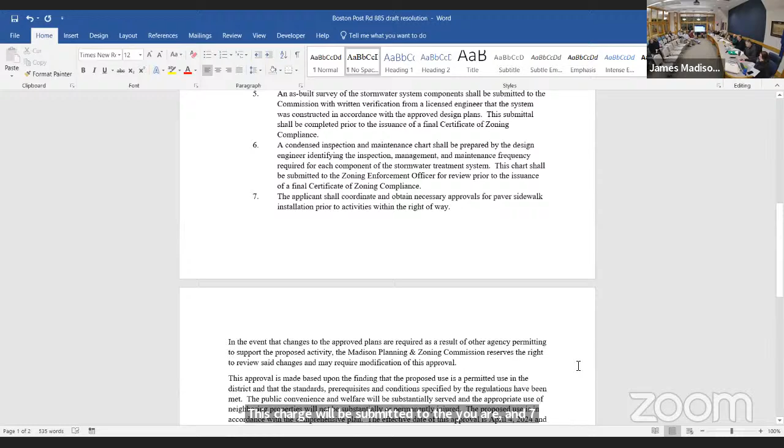In the event that changes to the approved plans are required as a result of other agency permitting to support the proposed activity, the Madison Planning and Zoning Commission reserves the right to review said changes and may require modification of this approval.

This approval is made based upon the finding that the proposed use is a permitted use in the district, and that the standards, prerequisites, and conditions specified by the regulations have been met. The public convenience and welfare will be substantially served, and the appropriate use of neighboring properties will not be substantially or permanently injured. The proposed use is in accordance with the comprehensive plan.

The effective date of this approval is April 4th, 2024, and upon filing of certificate of special exception modification on the land. Jim, so that's the approval conditions record. Second.

Further discussion - oh sorry, that would be John Morgan. Any further discussion for the approval of the motion as read by Jim? All in favor? Thank you very much, thank you.

Okay, moving on to our next agenda item.

Madison Planning and Zoning Commission proposed regulation text amendment to sections 3.3B and 19 to comply with Public Act 23-142, regarding family child care homes and group child care homes.

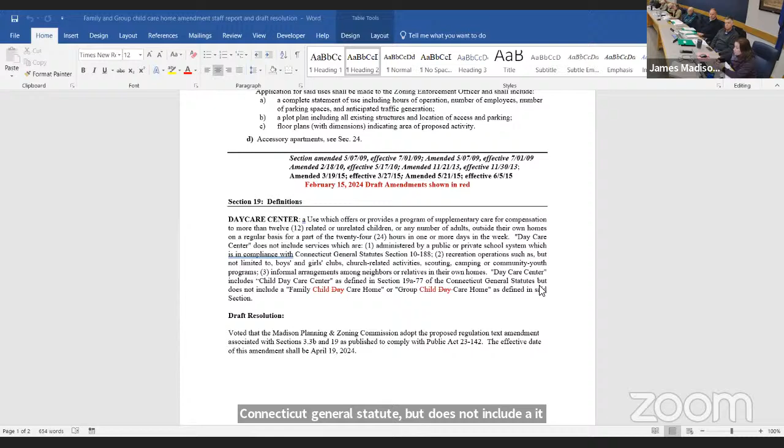Further in section 19, which is our definition section, we had language that defines the specific commercial daycare center. The last line of that is an exemption that a daycare center includes child daycare center as defined in section 19A-77 of the Connecticut General Statutes, but does not include said family daycare home. Our language is changing that to exclude a family childcare home or a group childcare home as defined in said section. So that is just a few lines, but now we'll be able to report that we will be in compliance. Any questions?

Comments? None. Questions from the public? I don't see any hands raised.

Could I have a motion to approve it? And then you need to read the draft resolution. Draft resolution: voted that the Madison Planning and Zoning Commission adopt the proposed regulation text amendment associated with sections 3.3B and 19 as published to comply with Public Act 23-142. The effective date of this amendment shall be April 19th, 2024.

Have a second? Any further discussion? In favor? Aye. Good, all right, so we'll close the public hearings.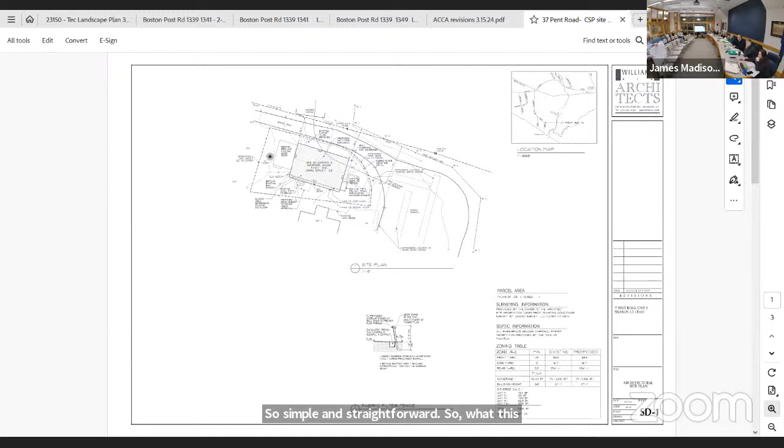Good evening, members of the commission. My name is Matthew Williams, my office is Williams Architects in Madison, 897 Boston Post Road. I don't have a really flashy presentation, this is not a flashy project. It's simple and straightforward. This is an improvement to an existing home, and an expansion of an existing second story.

The original house is only partially built, so I want to fill the rest of it in. Because the existing structure is within 25 feet of the coastal resource, that being tidal wetland, we were required by regulation to file a CAM application, and that's what we're asking for approval of. The state sent a review checklist out, a narrative or letter, which they only do when they take no exceptions.

There isn't any site work proposed within the scope of this, so we put a silt fence in anyway, for whatever reason, things that might fall on the ground. However, there's no disturbance or expansion of footprint or anything. So if you have any questions, I can show you more information, or walk you through the plans and drawings.

Quick question, is it the same number of bedrooms? Yes, same bedroom, same bathroom. We got one more bathroom. And so the septic would remain as it is? Yes, all that stays as existing, by regulation.

Any questions? It's a very strange house, I've seen it. Yes, it is. So it'll be, I think that will be much better.

There's a cluster road that sticks right out of the marsh. This one's actually further away from the marsh than some of the other ones. Is this the one that just went on the market? No, it was purchased 8, 9 months ago. Oh, okay, yeah, I remember when it came up.

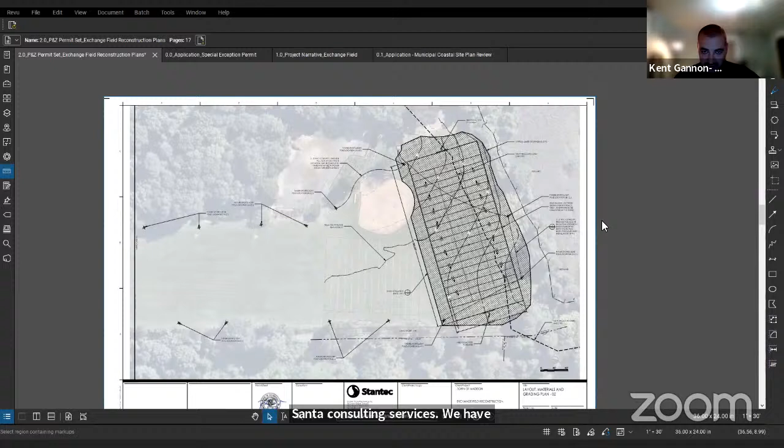Good evening, again I'm Kent Gannon, professional engineer with Stantec Consulting Services. We have offices located across the country, but I work out of the New Haven office located at 55 Church Street. We're here in front of you to present our application for the reconstruction of the youth football field at the Exchange complex at the Surf Club, and also coastal site plan application review.

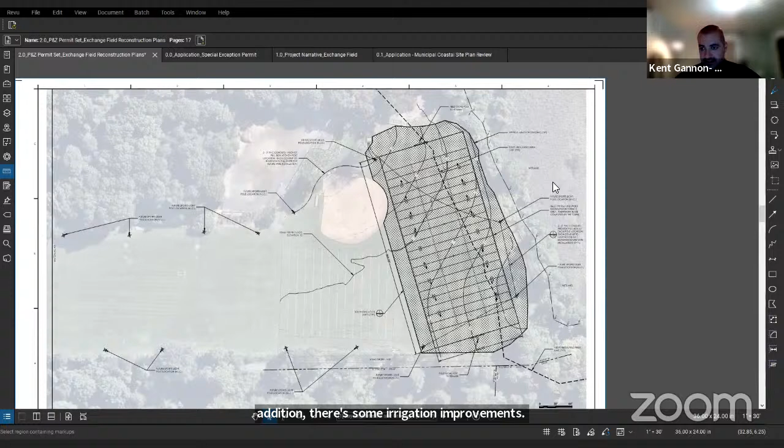The project's pretty simple. It proposes to replace the damaged natural turf youth football field with a new sodded turf football field. In addition, there's some irrigation improvements. This section of Exchange Field Complex is currently not irrigated, so it'll include the installation of a new irrigation system to help protect the investment of the town for producing a new sod field.

One of the other goals of the project is to rework the grading. If you were to visit the site, you'd notice there's a bunch of small dips and valleys in the field, which prohibits stormwater runoff from leaving the field. So you've got puddles on the field, which leads to some turf die off and some muddy areas, and it's a pretty well used field.

So just some non-ideal turf conditions. We're hoping to repair a lot of that minor grading with just smoothing the field out, and you can see some of the contours here, which accomplish that. In addition, we've got some sports lighting, which is not part of this project, but it's shown here just to add some context to the plan.

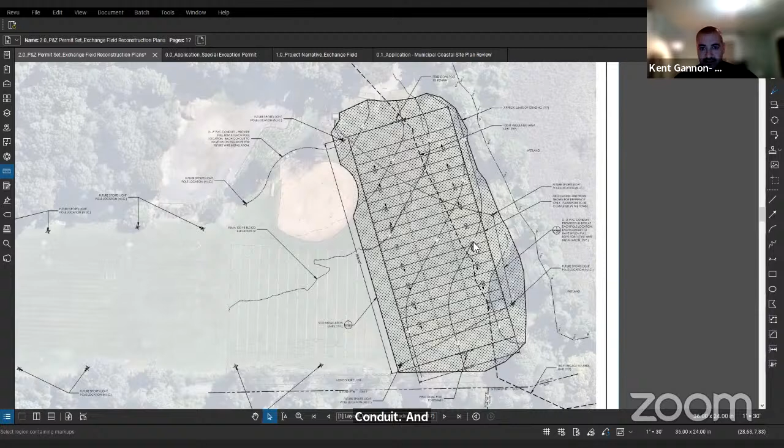So what we are proposing is to install some empty conduit throughout the field so that in the future, if the town ever were to come back and install lighting, they had the conduit there and they wouldn't need to disturb the field again. We've shown the striping here on this plan for the football field to add some context, so it gives you an idea of where we sit. The hatched area would be the new sod, and really minimal work beyond that, just some conduit and irrigation work. I can flip to the irrigation plan.

This plan will give you an idea where the irrigation heads are located. The irrigation building is an existing building located here within the park. There'll be some work within the irrigation building to upgrade some of the equipment, new irrigation controllers, and other equipment like that. I don't know if Austin has anything else to add, but I'd open it up to questions.

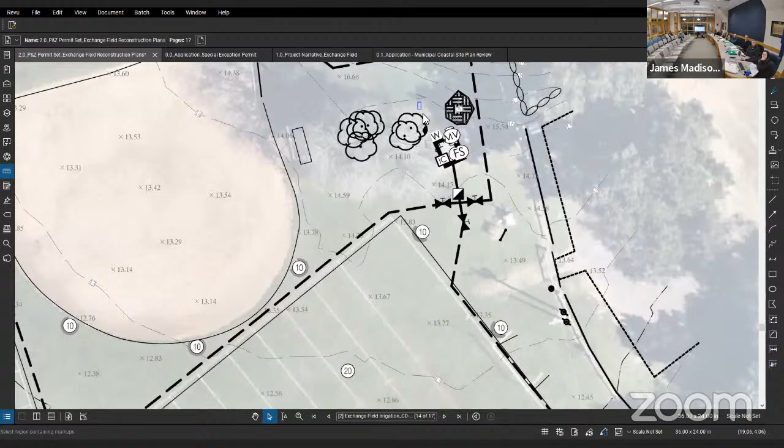No, I think Kent's covered it pretty well. Where's the rock? Can you see it? It's there, right outside that small building. Is it pretty close to the baseball field? Well, it's way past the third baseline, heading towards the golf course. What was the question, Austin? Sorry, I couldn't hear. There's a big rock by the irrigation house. That ledge, yeah. So these areas are some of the rock outcroppings.

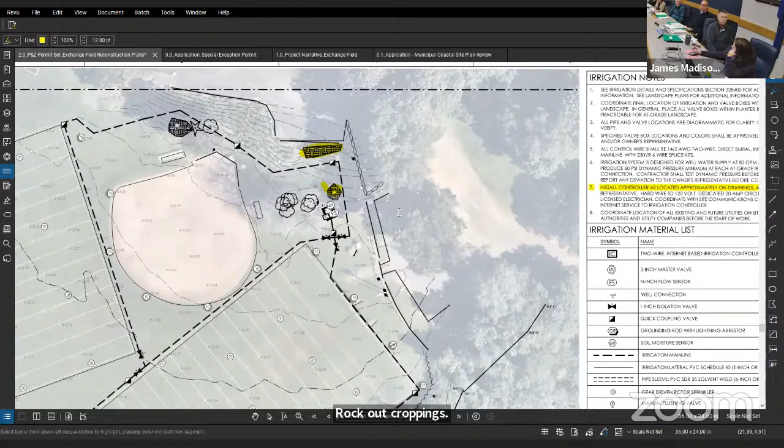To pick up on Kent's presentation, this also required a regulated activity permit from the Inland Wetlands Agency. They did act at their March meeting. Again, this is a site plan modification and coastal site plan before you. We did receive a checklist back from DEEP as well, identifying the on-site and adjacent coastal resources, stating that with adequate erosion and sediment controls, there are no anticipated adverse impacts.

Great, okay, any further questions? Could I have a motion for approval? We can read as drafted by Aaron.

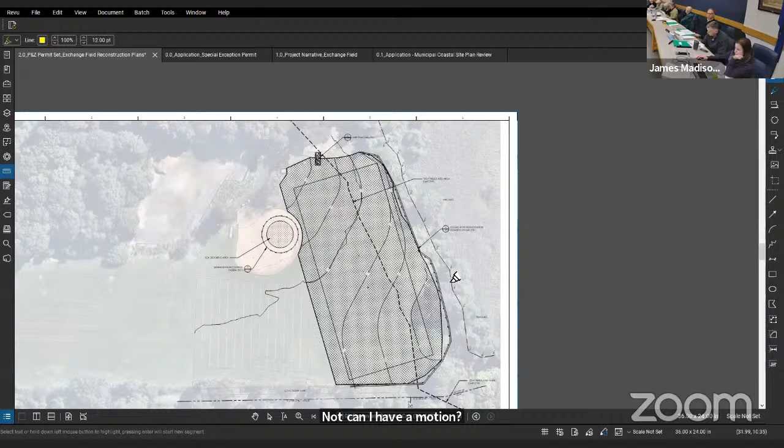Voted that the Madison Planning and Zoning Commission approve application number 24-05, CSP, 64 Circular Road, map 36 lot 50, zone R2, owner applicant Town of Madison, site plan modification application and coastal site plan application for reconstruction of the natural turf football field area, the Exchange Field complex, as shown on application documents, for the following conditions: 1, zoning enforcement officer shall be notified at least 48 hours prior to commencement of any regulated activity. 2, at all times during site work and until soil areas are stabilized, the applicant shall install and maintain erosion and sediment control measures, such as fabric filter fence, staked hay bales, or other measures deemed necessary by the zoning enforcement officer to prevent erosion and sedimentation.

In the event that changes to the approved plans are required as a result of other agency permitting of the proposed activity, the Madison Planning and Zoning Commission reserves the right to review said changes, which may require modification of this approval. This approval is made based on the findings that the proposed use is a permitted use in the district, and the standards, prerequisites, and conditions specified by the regulations have been met. The commission further finds the proposal consistent with all applicable goals and policies of the Coastal Management Act and Section 25 of the Madison zoning regulations. The applicant's effort to maintain adequate soil and erosion controls during construction activities reduces potential impacts to on-site and adjacent coastal resources. The effective date of this approval is April 4th, 2024.

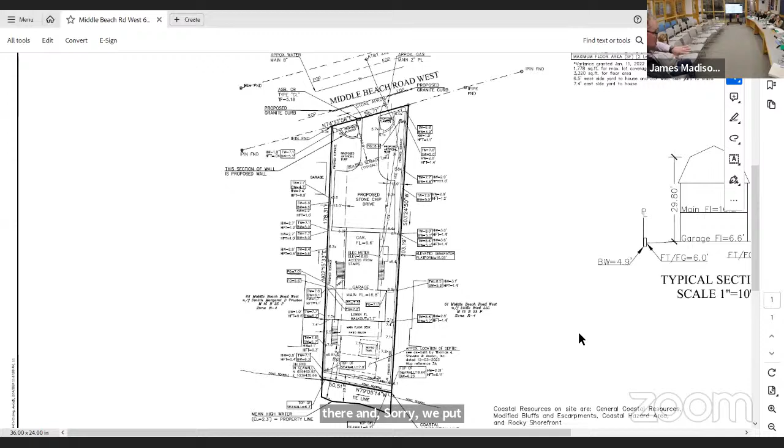It's complicated. Whoever thought a grading plan... again, we're talking about a grading plan on a 5-foot wide strip, but that's kind of what we're talking about. So I'll try to answer all the questions you have.

My question really, Erin, is more for you about process, waiting to hear from DEEP. So we heard from DEEP this afternoon, and I got their notification, sent it to Earl at 5 o'clock this evening.

We have met, both Maria and I, with the Tuckers to go through the walls initially to determine compliance with walls, retaining walls or finished terraces, how they're defined. We have finished terraces, landscape terraces, and retaining walls, all within the definition section 19 of the zoning code, and they have different requirements as far as the maximum height of the finished grade on the finished side versus the adjacent property. If you exceed a certain height, then those walls are required to comply with minimum setbacks. That is the reason why we have top of wall, bottom of wall, all the way along both the east and west property lines, to show that they are in conformance with the zoning regulations for finished terraces.

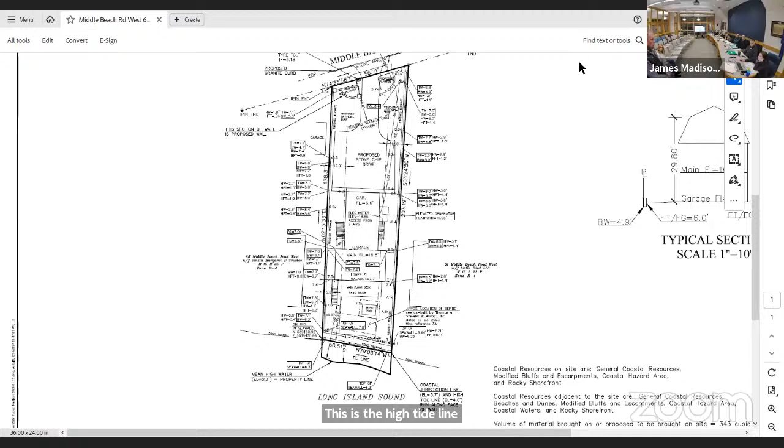Quick question on that plan. Is there something that does jut out onto the beach, or I couldn't really tell from the plan? Was that existing? Nothing juts out onto the beach, just wanted to clarify. Those were all labels, this is the property line, this is the high tide line, that's the edge of the seawall, and this is beach. So as you see, the stone walls run perpendicular to the seawall.

And I've been watching the construction. I know exactly what's going on there. Like a herd of turtles, we're getting. So do we. And you should put a turtle crossing sign. It's a long, painful process.

There are some rain garden drainages across the street at a couple of properties, but this is so narrow, and there is subsurface stormwater infiltration on site. That was part of the original application to build the house, which went through a coastal site plan. There was very limited site grading shown on that site development plan, and that's what sort of triggered this — there were changes made to the landscaping plan that raised flags for staff as we drove by.

The second question was whether or not a significant amount of fill came in to the property associated with this grading — were you raising the grade of your property? So we did ask that the Tuckers calculate the cubic yards, and that fell within the allowed acceptable amount for a single family dwelling. So there were no additional fill permits that were required.

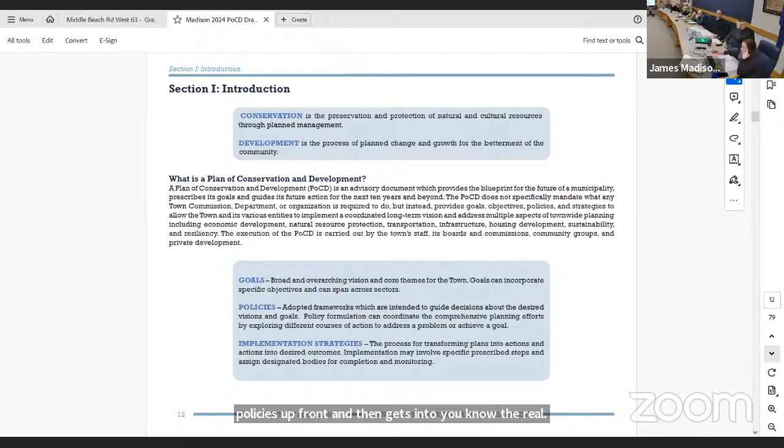I kind of read through this quickly today as well. It throws together the visions, the goals, and the policies up front, and then gets into the real history, introduction, everything behind the POCD, how you went about doing this, your whole process. Then we break through into the natural and built environments.

And our history here, demographics again—none of this has changed, you've seen this. The only area that really changed was some comments and feedback from Bob Reinhardt, in section 5 and section 7. Section 5 was our policies. Where am I now? Oh, I got to jump a little bit.

So I'm just giving you a quick overview, these are our maps. Now, as John indicated at our last meeting, we were going to put some smaller maps in the text and then have an appendix at the end with the larger maps, since some of them really wanted to be in portrait, to go with the shape of our town.

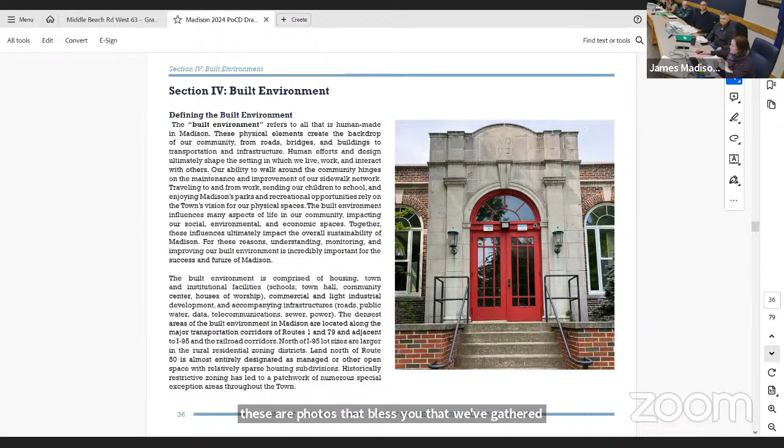These are photos that we've gathered, some from Carol along her bicycle adventures throughout town, and others coming from our IT department and photos the town has taken, which are really good, utilizing Rita's very nice camera.

We're getting there, we're getting close. You can click from the table of contents, right? Yeah, I was going slowly. That's enough out of you. Okay, so section 5 policies.

Some of them we consolidated a little bit and made more actionable so that as we transferred into the implementation table, you could clearly say yes, this is a task we need to do. So we met for about an hour and a half or so to go over his ideas, hash them out, and work on some wording.

And then I think we sent that to you, Carol, and then to John. So we've had a few eyes on it, but that's so you can focus on that. It's a little bit different, but really all the same concepts. Every policy and action item is still encompassed as you initially wrote them.

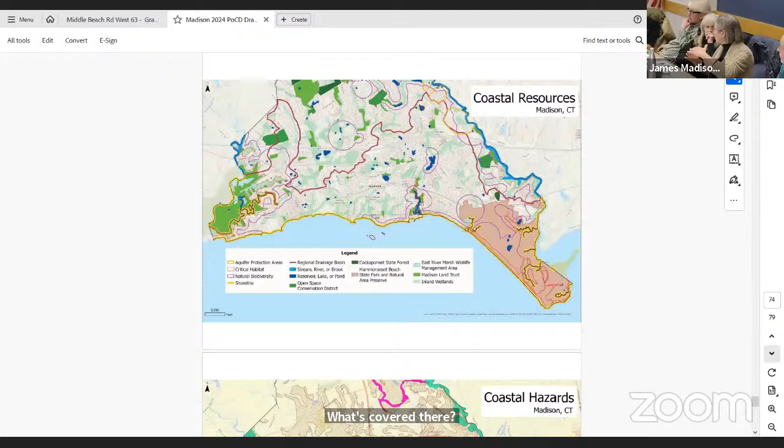And then I also just went through for consistency between natural and built environments to make sure we had the same kind of sequencing, the same kind of material and information there.

And then, like Erin, I put the different plans in chronological order in both places. So just tweaking, fine-tuning those sections, and also changing it from 2023 to 2024 throughout, including on the title page.

It was good. Let's schedule the hearing before it turns '25.

Anyway, I just wanted to say that I've reached out to Erin and John and Bob. I think you were copied on some of that about little tweaks I'm still doing. And so John has responded saying yeah, still tweaking.

That's what I hope everybody's able to read. But can we schedule my hearing along with this? Yeah, because you're going to publish it. So we read it, two weeks change before the next meeting, so.

My request, I spent a lot of time with this, with Erin, we're stuck trying to get through it. Every time I meet with her, Peggy steals her.

What's that? Every time I meet with you, Peggy steals you for like 20 minutes. It always seems to happen. They plan, but I never accomplish anything. I'm always interrupted.

My point is that in section 5, where the policies, the actions, and the sub-actions are listed, things were moved around, things were reworded, things were consolidated. It keeps the spirit of what we all did, but we never had a meeting where everyone's gone through and said, policy A, objective 1, I agree.